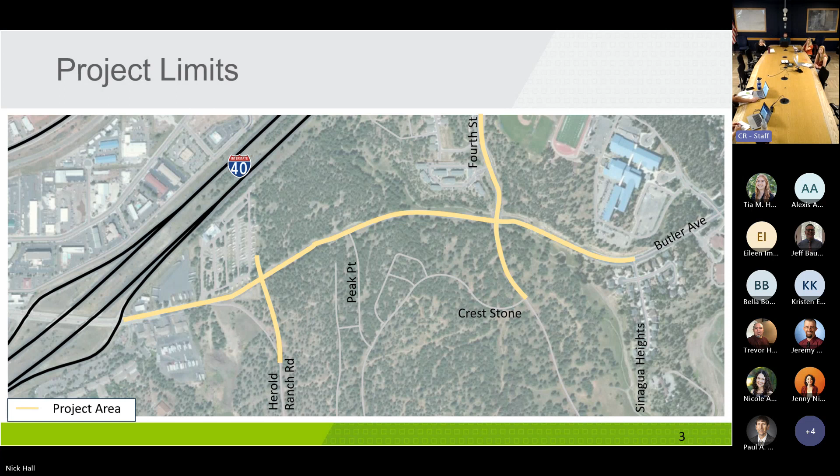A little bit about why we're here today: this was historically two projects, known as the Butler Avenue widening project and the Butler 4th Street intersection improvement project. We combined these into one project, which defined this overall project limit. At its basis, this project will widen the existing single lane in each direction—a 2-lane section—to a 4-lane section, with 2 travel lanes in each direction and a center median. So access control is going to be important. It's funded by the old transportation tax, which was passed back in 2000 and was in effect for 20 years.

And then there's the new transportation tax, which was renewed in 2018 and became effective in 2020. There are also developer contributions that are part of the funding. As you've probably noticed if you've driven this corridor, development has been quite active. Instead of developers building improvements that we'd tear out and replace, they make a cash contribution to the city, and we build those improvements across their frontage. So that's a significant portion of the funding for this project.

One thing we won't spend a lot of time on is that the Butler Avenue and Herold Ranch Road intersection is slated to become a roundabout, driven primarily by that center median I mentioned. We're restricting access control, so at Little America's truck stop, trucks will no longer be able to make left turns out of that parking lot. If you've driven through there, you know all the gymnastics involving large vehicles. They'll have to make a right turn, go east to Herold Ranch Road, where there will be a roundabout allowing a U-turn so they can get back to the interstate and go their respective ways.

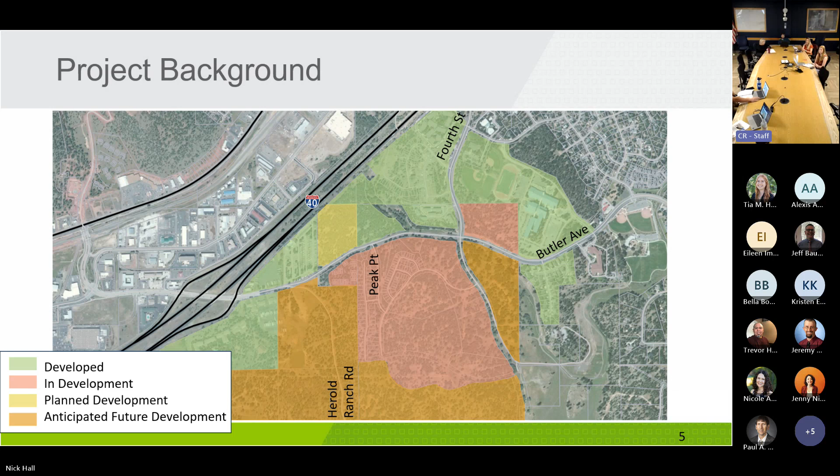This is roughly 1,500 homes, townhomes, and apartments. To put that in perspective, it's roughly equal to another Country Club, or about two Cheshires at Liberty. It's significant — this will be a bit denser than what we have there, but it's a major development, and it's just one primary development. There's also a significant retail component, roughly equal to about three of the Fry's shopping center areas over on Switzer. So there's a lot in the pipeline that will be coming online over the next several years.

Our project goals: very early on, when we did our initial project charter, which defines what the project is all about and what we're striving to do, it really boils down to improving facilities for all modes and all users of this corridor. This process is informed by a number of plans, policies and goals, including the regional plan, the carbon neutrality plan, the active transportation master plan, and Mountain Line's Flagstaff in Motion plan. And it's really driven by underlying safety.

On that note, what our firm really puts into place, and why we enjoy helping with this project, is that safety is paramount to us. The city has stated its interest in Vision Zero, which has become more of a commonplace term. The basic premise is that zero deaths is the only acceptable level. In the past, especially in construction, we actually budgeted for deaths on job sites — there would be so many fatalities expected. Now the goal is zero, not some percentage per capita. The goal is zero deaths.

Part of Vision Zero, and why everyone is adopting it now, and what we use to achieve this, is the safe systems approach.

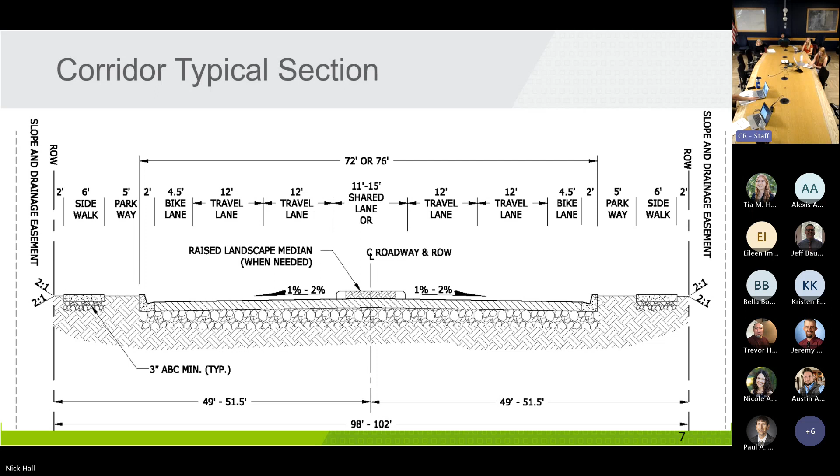What we did here is take that time-and-space concept and move the on-street bike lane off-street. So now on either side we effectively have a full width of 11 feet: 6 feet of sidewalk and 5 feet of directional bike lane on either side of the street, with that 5-foot parkway buffer. There are two 11-foot travel lanes, so we took a foot off of each travel lane. We still have the center median, and that repeats on either side. This is a significant improvement for supporting the active transportation master plan, carbon neutrality considerations, and so on.

I would just add that, as Jeremy mentioned with the lanes, wider lanes usually increase speeds. It was found over time that these nice large 14-foot lanes let people go really fast. So making them smaller and narrower, not to the point of promoting collisions with vehicles, that's also bad, but finding the smallest, safest lane we can do so that drivers feel a little more confined and think, 'maybe I should go a little bit slower.'

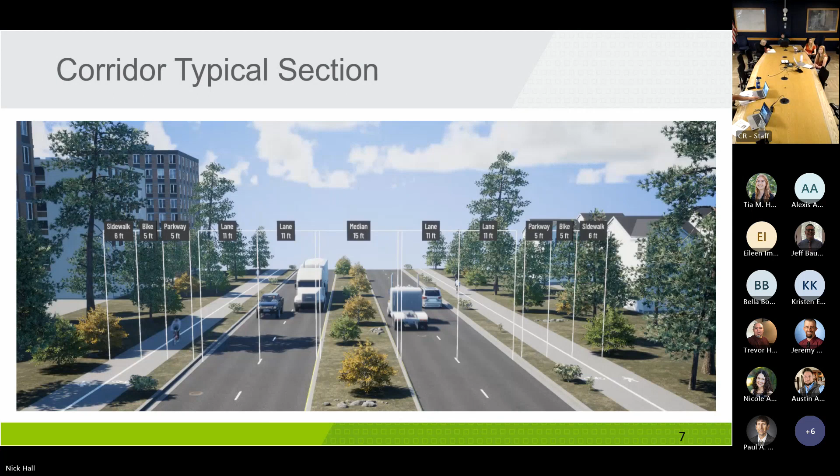This zooms in on that separated bike lane and sidewalk. As you can see, we've got 6 feet for the sidewalk and 5 feet for the directional bike lane. Again, we've got all users along the corridor, from comfortable users all the way down to people who are more cautious and unsure. This is intended to serve all of those different modes and give them facilities that meet their needs.

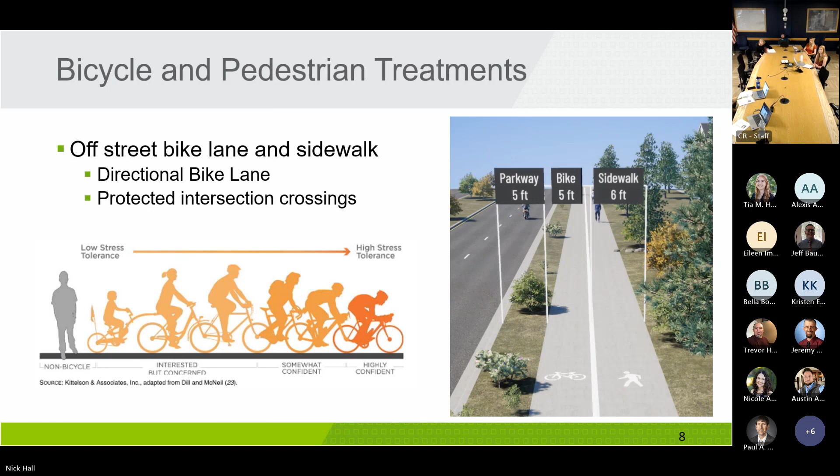At the intersections, we'll talk more about this, but we will have protected intersection crossings. You've probably seen around town the green striping that complements the white striping for pedestrians and so on. As mentioned, a lot of these features—narrower lanes, landscaping in both the median and the parkway—all serve to slow traffic down. This is the graphic we're seeing here, from a Vision Zero perspective.

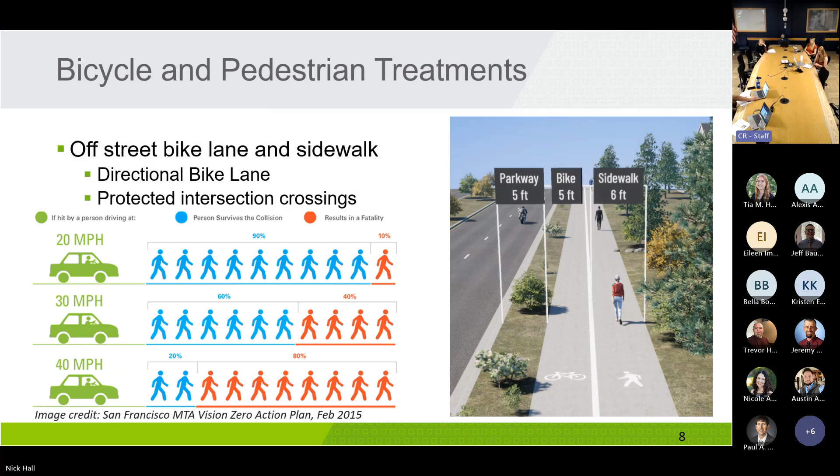The numbers you're seeing there are the speed at which that vehicle is going when the collision happens, not necessarily the posted speed limit. Speed matters, especially with large vehicles, and it makes a dramatic difference when we go from 40 miles an hour down to 20. That's honestly been a guiding principle for our team as we've evaluated our options.

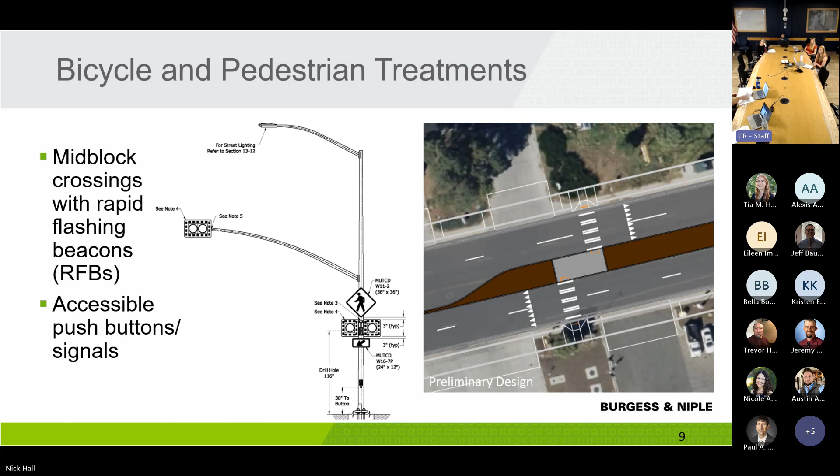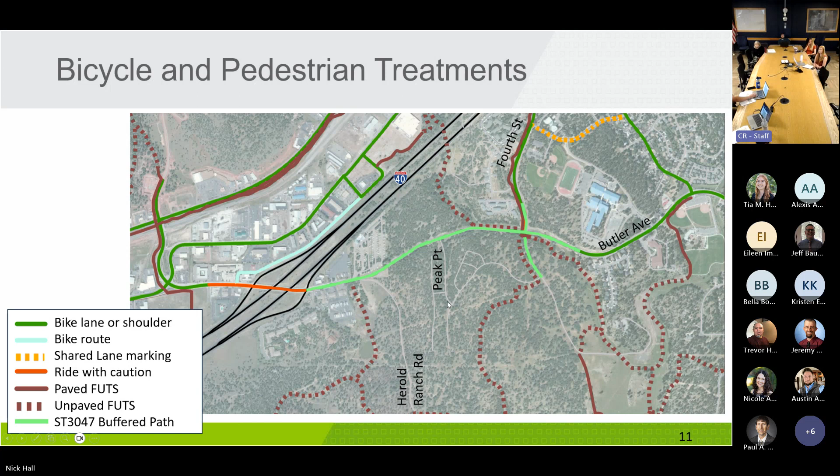On this next graphic, showing the project limits again, we want to focus on the transit opportunities for this project - not opportunities, but what will actually be done. The green paired bus stop is the existing stop along this corridor. We'll also be adding a paired bus stop at the Peak Point intersection as that's being built. At Butler 4th, there will be a total of 4 stops: a paired stop on the west side of the intersection, and then a north and south side for north and southbound.

The crossings shown here are the proposed pedestrian and bike crossings - all enhanced crossings. Every single one of these will have rapid flashing beacons and enhancements for crossing; they will not just be a crosswalk at these locations. We worked closely with Mountain Line to ensure this meets both their current operational needs and their future needs as this corridor builds out.

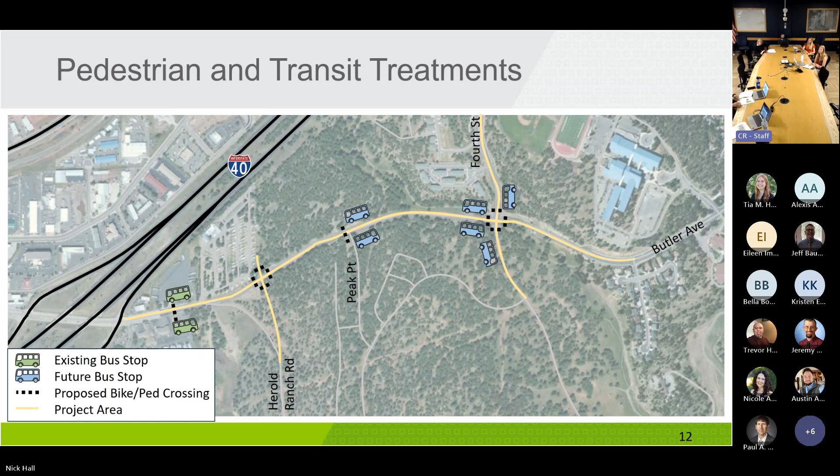All right, I guess that wasn't really... So as I mentioned, we spent a lot of time evaluating different alternatives, particularly at this Butler 4th intersection. That's really what has driven the large majority of the conversation about what this project is going to be.

We started off with a smaller number. It grew as we evaluated and moved forward. We found out what we didn't know that we didn't know, and we went back and looked at those. We had a lot of good conversations about what this could look like, what it couldn't look like, and everything in between.

There were several steps that took us to this point, and I'll cover this in brief. We built up a total of 11 different alternatives to look at. We were able to narrow that down to about 3, and at that point the project team developed a long list of criteria to look at - how these perform, how they compare for vehicles, pedestrians, everything we can look at - and we'll get into that criteria as we move forward. But just letting you know we came down to 3, and ultimately the project team selected a preferred alternative to present to you today.

Again, reminding you of the project team - we had engineering, transportation, maintenance was in there, and Jenny's been a part of the process the whole time. We've had this multidisciplinary representation to voice the different needs of this project and for the different users, and that's what we've been trying to evaluate this entire time, not just from an engineering standpoint.

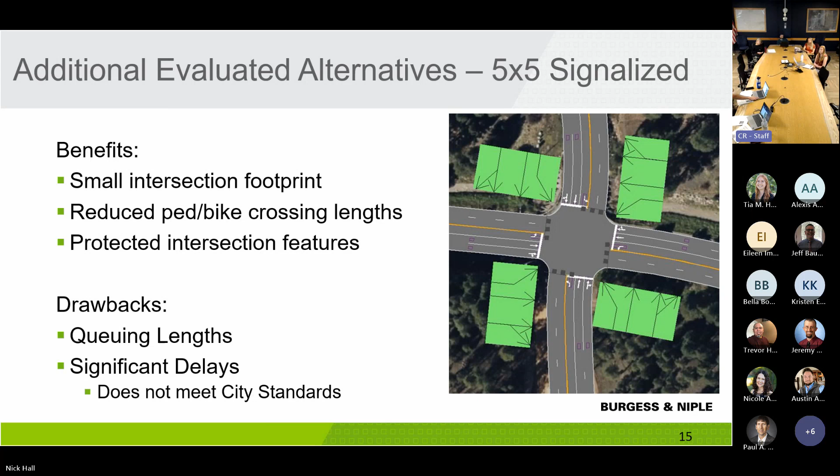Another one in the same spot was this 2x2 roundabout, so just 2 circulating lanes across the whole roundabout. Pros: reduced crossing lengths for pedestrians and reduced likelihood of high severity crashes. This is true for both of the roundabout options.

You'll see that with roundabouts, we can actually use engineering design to geometrically force vehicles to slow down. If you allow them to come straight at it and go right through, then yes, people will speed. But by moving the alignment and bringing it back, we can make a 15 to 20 mile per hour entrance speed. That's, as we showed earlier, a lot better than 30, 40, or even more so if someone may be running a red light at 45, 50.

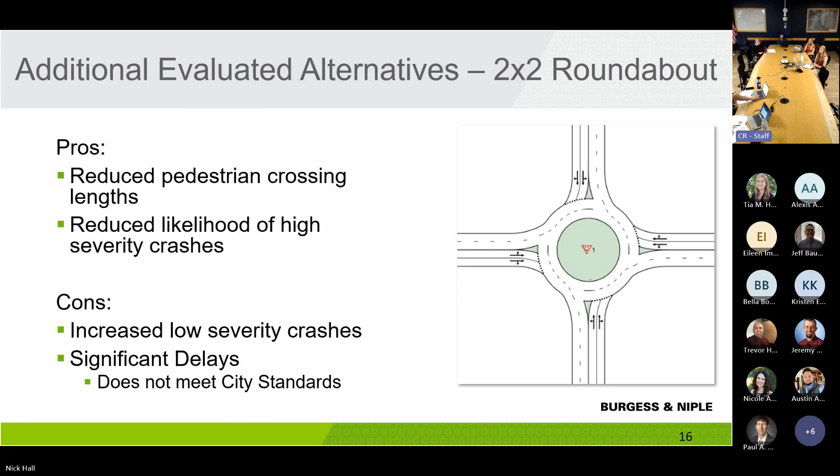Cons on this one: increased low severity crashes. Roundabouts help reduce fatalities and high severity crashes, but they do increase fender benders and what we call property damage crashes. So people still get upset, but they're not going to a hospital or worse. Also, the significant delays on this did not meet city standard. That does take us into the three alternatives that made it to the final round, you could say.

So this is the largest one, going from smallest to largest, bookends of it. This is 7 lanes wide in both directions. This was shown to meet the level of service standards, or the delay really. I won't go into too many details of what lanes are going which directions, but again, it's 2 through lanes in all directions because of the 4-lane corridor.

Here I will zoom in and talk about the protected intersection features that we will be using no matter which alternative ultimately makes it through. So one, the kind of maroon area, this is a truck apron that's still going to be raised, most likely concrete, that passenger vehicles will not want to occupy. It would not be a fun ride over it, but it does allow a semi-truck trailer to come over. This does ultimately bring the curb down to a smaller amount so people can't make right turns as fast, so it's not a big sweeping right like some of the intersections we've seen in the past.

The green area is a bicycle waiting area for when it's time to cross. We have the crosswalks for both pedestrians and the bicycle users coming across, and there's also the pedestrian waiting area across the bike path to proceed across the intersection. So these are what make it a protected intersection and allow for that continuous bike path around the intersection, the tighter curves, and offering those waiting areas.

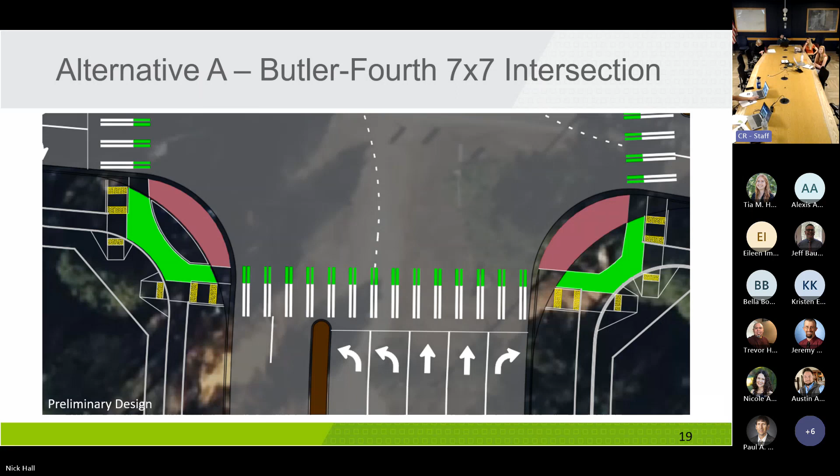The second alternative was the 6x6 intersection, so one lane smaller than the 7x7.

You can see it in here. We'll come up to later that we do look at overall pedestrian crossing length, and one of the challenges we did face is that the 7x7 and 6x6 are the same overall in the worst condition because of how the through lanes line up and the dual lefts. You can see there's these closed lanes on the north side and on the east side. There really is wasted space and an additional pedestrian crossing area. That's so the lanes line up across the intersection, unfortunately.

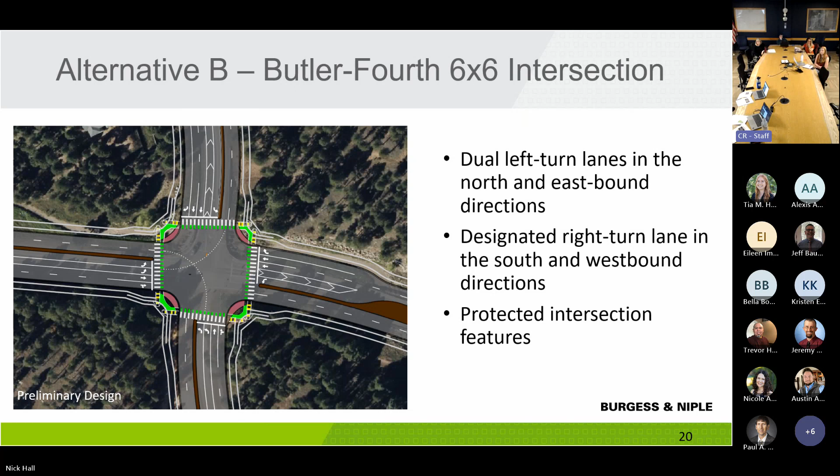All right, the third alternative, alternative C, is again a 2x2 roundabout, but now the difference is there is a channelized right turn lane on all 4 corners. So this allows the right turns to get out of the circulating traffic and make a right.

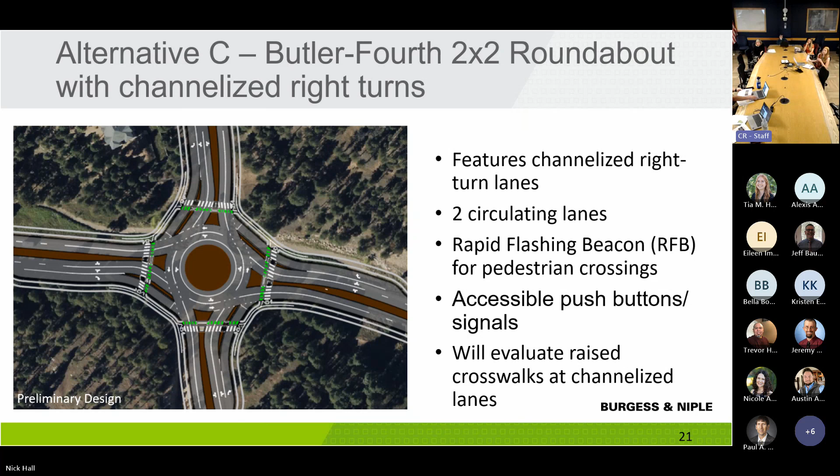Something to note on this one, I don't think it shows it, I'll zoom in, it's a little easier to see. So on this northbound section right here, it will be a yield condition, not just a free flow coming around. As Jeremy pointed out earlier, these are preliminary designs, and we're going to work to tighten that up as much as possible. Ideally it'd be a T intersection, but there's going to be some slight angle to it still. We want people to come up, basically have to stop and look to make sure it's clear both for pedestrians and for vehicles, then proceed.

And again, we have the dedicated pedestrian and bicycle crossings for the roundabout as well.

One thing to note here that slightly comes up later, but this is probably the best time to talk about it, is the crossing experience as a pedestrian at a roundabout versus the signal. Based on when you approach a signal, it may have just changed and you're waiting for a whole other cycle before it gives you the walk signal to come across. Here there will be rapid flashing beacons that will light up and alert traffic that you're trying to cross. Maybe the first car does or doesn't stop, maybe the second one stops, but it could theoretically be a lot shorter time frame than waiting for a full cycle of the signal and then being able to proceed through each leg of this.

And inherently, crossings at roundabouts are different from signals. They're just a different experience in the sense that you have to be a more active participant when crossing at a roundabout. That presents both safety opportunities and safety challenges, because roundabouts have historically presented a challenge for some of our visually impaired community, who are not able to safely judge whether or not it's safe to cross because we don't bring traffic fully to a stop.

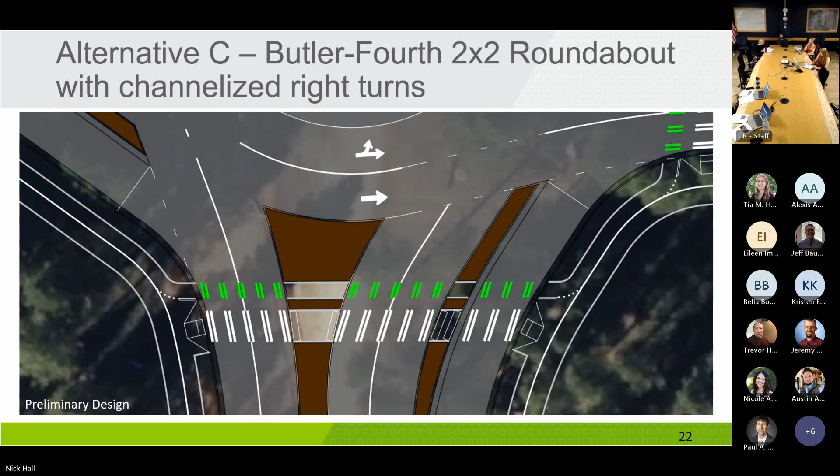All right, so we're going to start going into the matrix that we use to rank these. There was 7 categories that had a lot of different subcategories within them. There's a few we're going to go into detail today. Some I'll just talk on what was included in that category, since we had an overall 73 criteria, so there was a lot to it.

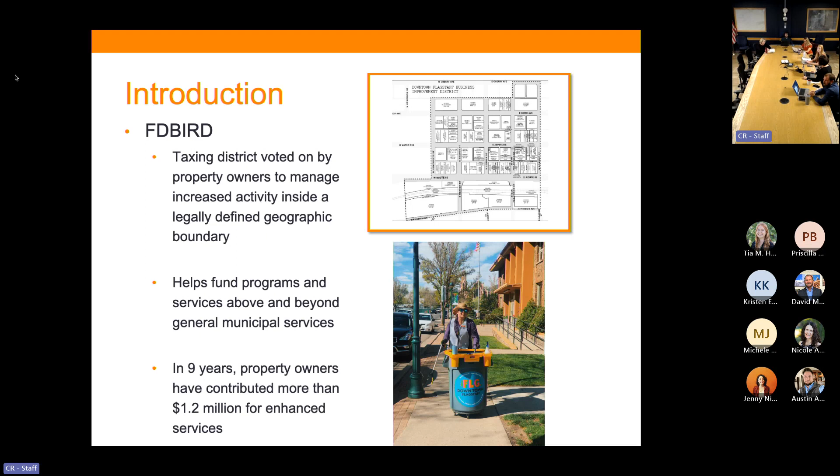And the Downtown Business Alliance, where the taxing district is a quasi-governmental entity that is allowed to tax, the Downtown Business Alliance, we are the public-facing nonprofit entity. So the taxing district contracts with the DBA to deliver those services.

And some of the services we provide, we have a Clean Team Ambassador program. They're a uniform team that works 7 days a week picking up trash, removing graffiti, making sure our public spaces look really good. Those wonderful trash and recycling bins that are downtown that the city, together with sustainability, put out, we're the ones who help maintain them. We keep the lids clean. We make sure people are putting trash where trash belongs, recycling where recycling belongs. So we work hard with our city partners to make sure our public spaces are maintained and welcoming for our residents and visitors.

We work hard to promote downtown. So where the taxing district has a legally defined boundary, the DBA is public facing, and we work with the entirety of downtown, north side, south side. I feel if you were to ask 10 members of the public to define downtown, all 10 would have different descriptions, but almost all would include south side as downtown. There are no magical walls and fences that define the taxing district that are in place. That's really behind the scenes. So DBA promotes the entirety.

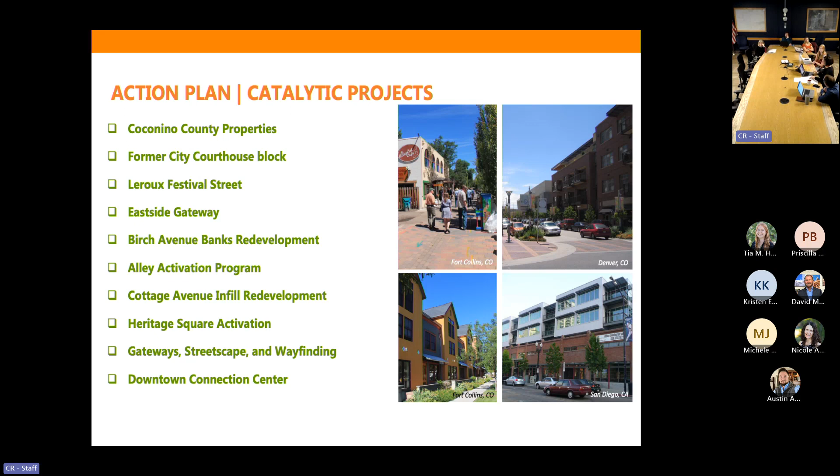There's another surface parking lot where the former municipal courthouse once stood, at Aspen and Beaver. We think that is a prime location for a mixed-use development. It does not belong as a surface parking lot in the core of our downtown. Mixed-use development all the way.

For the downtown experience, we want to maintain our historic charm and our character. We want to have a wonderful street presence and walkability. Sustainability is a core value in how our downtown is managed, improved, and developed.

We are tied into the Downtown Connection Center, public transit. Mountain Line is a funding partner, so we're working side by side with them.

This action plan does have implementation and funding strategies. They're still being developed, so I don't have the answer of how we will implement, but the consultant team will provide that to us. We are seeking feedback now. We do go to City Council for a work session conversation in October, and then we hope to come back to Council for final plan approval in November.

I will say though, if we are not able to do a robust enough job of getting community feedback, this timeline may shift. It's more important for us to hear from the community than it is to get this shoved down people's throats.